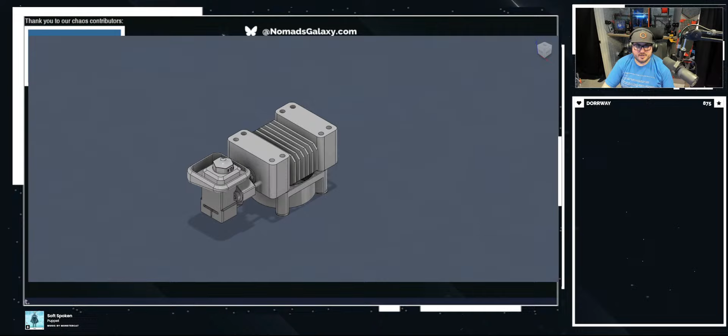Okay, there we go. So how do you do that really cool effect that we do for the t-shirts? It's actually kind of easy. We go into animation, and what we're going to do is literally break apart the CAD. There is an option to just straight up explode the CAD, but I don't like that too much, so we're just going to manually take this apart.

And we're going to do it from this perspective. Is it being weird? There we go. From this perspective, that goes the furthest most out. And that.

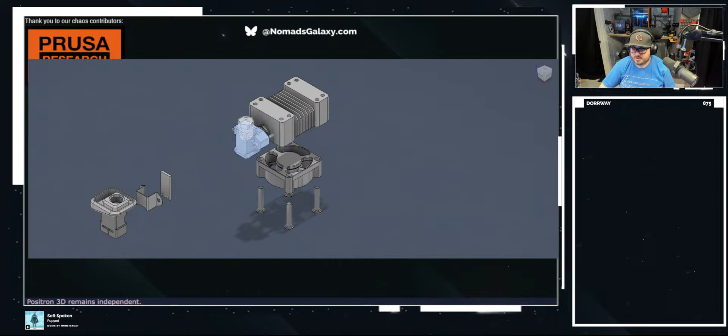I'm gonna grab both of these and move it over. And then we bring that up.

Drag these out. Let's see, who else is here? Who else is in stream? I'm seeing Mad Owl, Cody, a robot overlord, LTX - hell yeah, only the coolest of people. Clown Hammer. Who else?

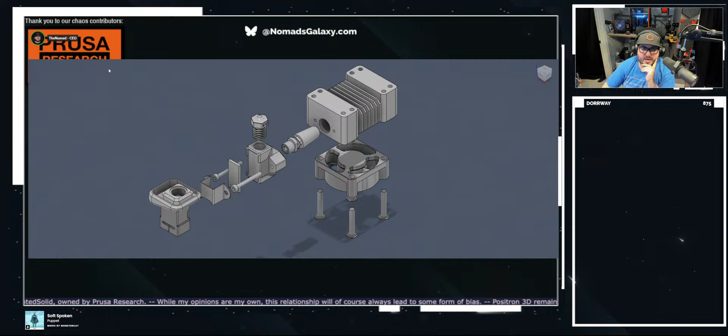Okay, so now we've exploded the CAD. What we can do is, I'm trying to remember where it is, but there's a way to essentially take this and export it.

I'm just trying to remember. I think it is... export. No. Okay, new drawing from animation. Yep, storyboard 1.

Yeah, we had to reboot to fix everything. Okay, now we go in here, and what we're gonna do is thread edges, interface edges, and let's see.

It's not doing anything. Why is it not changing? Oh, there we go. Okay, so let's do visible hidden edge. Ooh, nope, we're sticking with that.

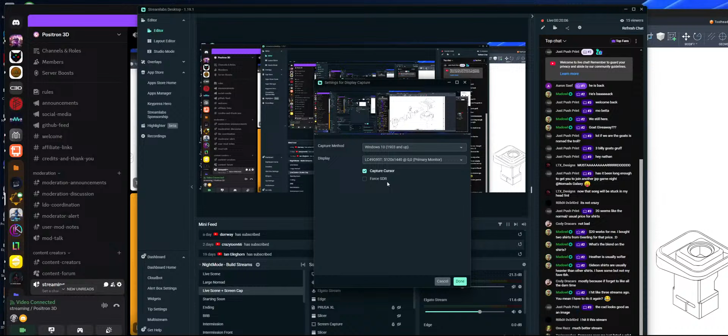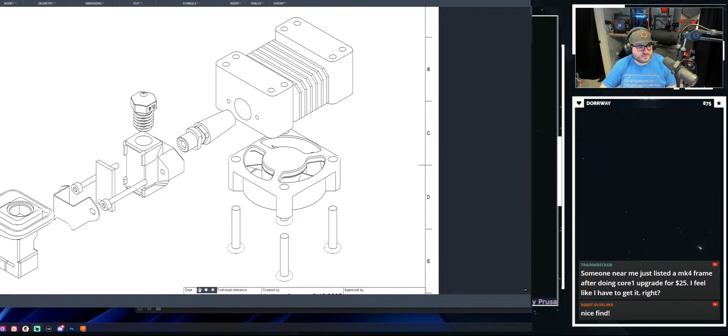And we're literally just going to trim this down. There we go. Now you can actually see what we're doing here. Sorry, I didn't realize you guys couldn't see that. Fusion is really stupid when it comes to streaming, it's a whole spiel. Okay. So anyway, now we have the exploded CAD as it should be.

So what we can do now is I can actually export this as a PDF. And then I'm just going to export this as exploded hot end. Now we're going to take it up into Adobe Illustrator.

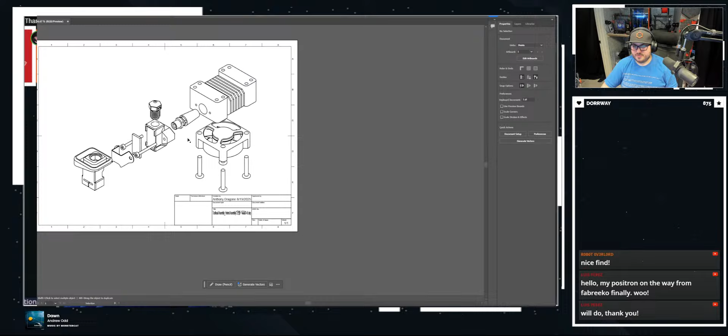Okay, so now that we have this as a PDF, the great thing about PDF is that this is all vectors, so this is infinite resolution. So we don't have to worry about anything.

What I will do is just delete my personal information here. Oh, okay, so that's the way this is layered, weird. Okay, delete and delete. There we go.

All right, and there we go. Centered. Okay, so now what I can do real quick if I want to make this look a little bit more... oh, the strokes are different. Damn, okay, we're going to leave it as is because I think that's pretty good. You can very clearly see what's going on here.

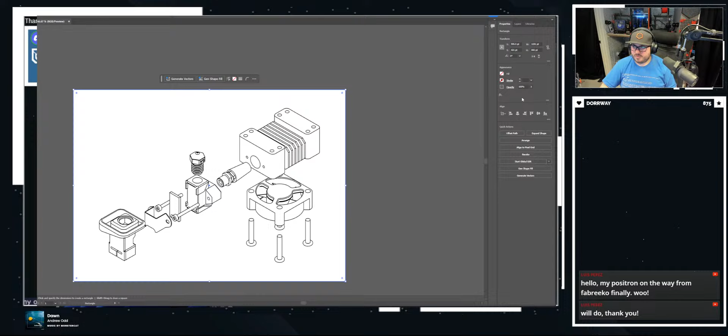What we're going to do... Nomad, do you want those screws, the mounting screws, do you want them moved? No. The ones in the front? Yeah. Are they not a different position? One second, maybe that's me being OCD. No, these are in the right position. The whole idea is that if you were to sandwich it together, it would be technically correct.

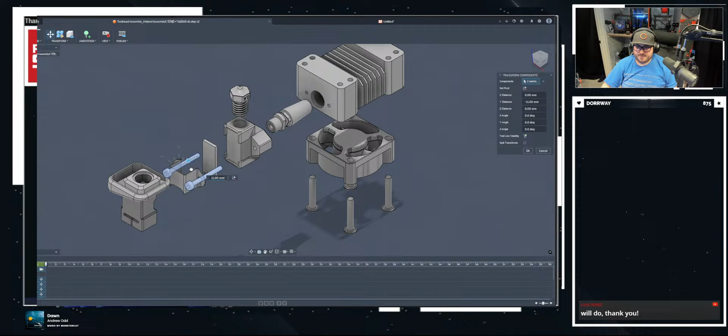The ones that fasten the heat break on, not... yeah, technically it is in the wrong spot because it's technically ahead. So if I go back in here real quick... actually, that's a good idea, just keep it like that so it'll trigger people. Right, now I can swap these around, but you can kind of see how that disrupts it a bit. Yeah, you need to push everything. With this, it's a little bit more visually distinct.

Yeah, chat, what do you think? Should we swap the position? Should I move this closer? Ooh, because I can do this. Chat, do you think we should do that, or should we keep the screws attached to the heat block? What do you guys think about this?

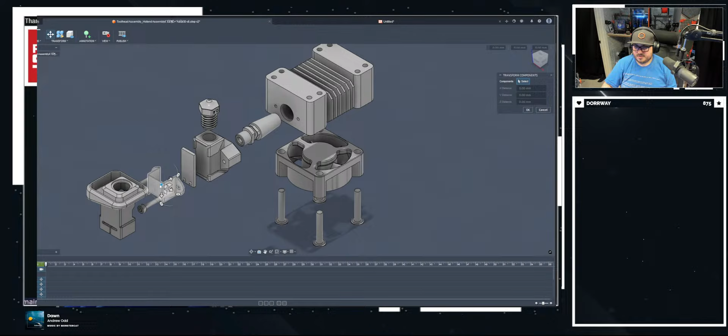No, no, furthest out? Move the heater. Where? I want to see the full geometry of the heat block.

This? Yeah, the front, move those a little bit. The heat block or the sock? Why do you need socks? People don't need socks. Anyway.

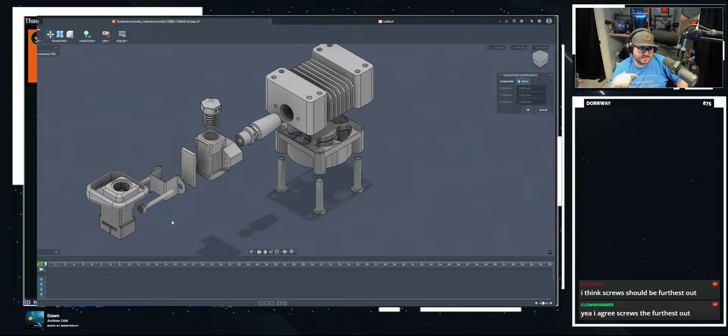Let's pull this up a bit. There we go, it's a little bit more condensed. Okay, so that is now appropriate, because the sock, the heat sock, the silicone sock, that's actually going to be last because that kind of goes around everything. All right, that works, cool.

So we're going to go ahead and do new drawing from animation. I'm going to hit OK. It's going to hop back in here. We're going to set the scale to 2.5. We're going to go in here, set that to visible edges only. Interference edges. Okay, and there we go.

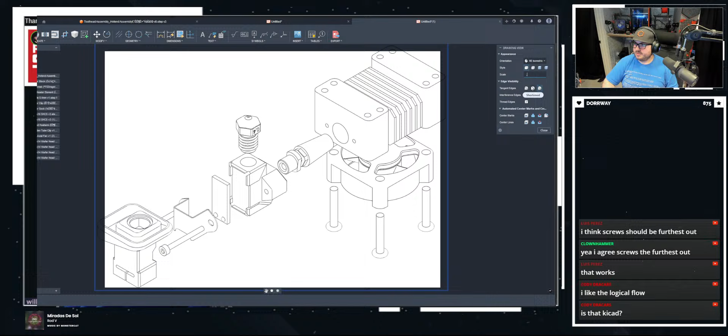Actually, let's bring this up to 3 now that we have more space to work with. No, this is Fusion, this is all in Fusion. While I'm in here I'll just go ahead and delete these assets because we don't need them. Let's scale this to, oh no, let's do 3.5. There we go, perfect, okay.

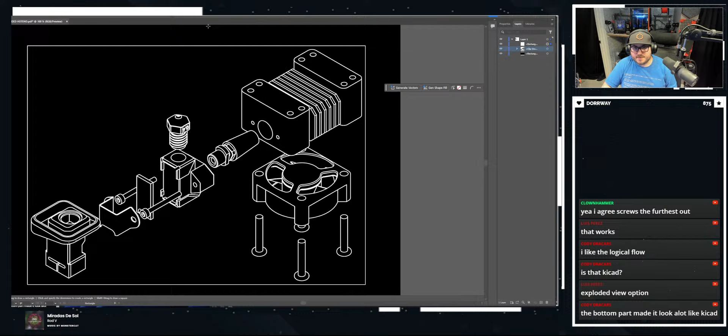This has been... I'll move this over. There we go, and shrink this down. Right there. Okay, that's fixed. Okay, so now what we're going to do, we're actually going to just delete this.

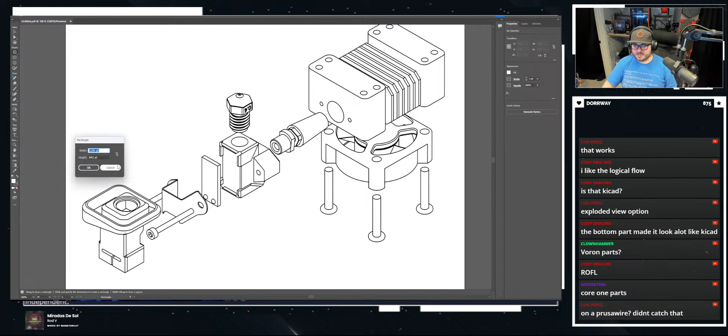Okay, now what we're going to do here. So technically, no background should exist. Technically. So we're going to select everything, select stroke, set to white. And now what we're going to do is put a black square behind everything. This just helps us confirm that everything is indeed the right way around.

Okay, so as you can see there is this path on the outside we want to get rid of. So we'll delete. Oh, God.

Cody, I like what you're thinking. I have a Mark II. Another Prusawire, friend. Okay, there we go.

Now we delete that. I mean, it doesn't matter, we're gonna go ahead and keep it 12 volt. Should I do a Mark II export? And then this is going to be exploded hot end SVG.

Now we open up our... now we open up Photoshop. Just gotta make sure it's... there we go, this is a jank stream, guys. Open. Exploded hot end SVG, okay.

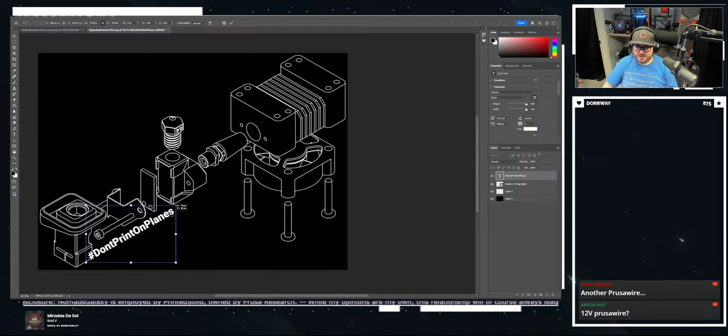That doesn't feel like it is. Oh, actually, maybe it is. All right, we're going to just nestle that right here. That feels appropriate. And I'm going to take the positron logo.

Oh, that's why. Where do I have automatically? Yeah, auto select, turn that off. I don't want that. Okay, there we go.

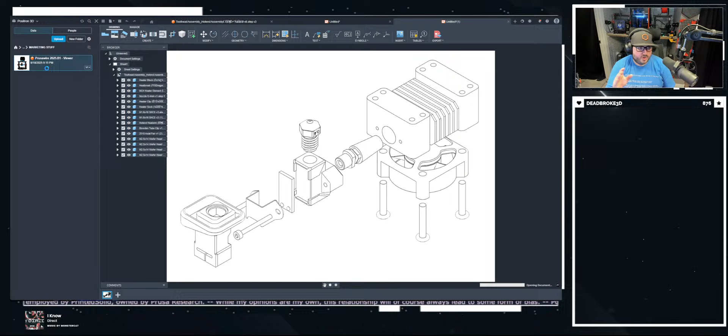So what we're doing here, any of you can do. If you want to make an exploded CAD t-shirt, this is how you do it. It is really not that difficult, it is just time consuming. So let me go ahead and get rid of these since we don't need them anymore.

Okay, so we're literally going to animation. Okay, now I'm going to actually change the visual style environment to gray room just so I can see a little bit better. I don't need to save it locally, I already moved it to something else entirely.

Okay, so what we're going to do, we're going to hide stuff that's not critical. Yeah, this is in a marketing folder, so everything I do will not affect anything of what's actually going on here. Okay, pulley alignment, heat set insert, okay, hide all of those. Now we're also going to hide the spools because we don't need those.

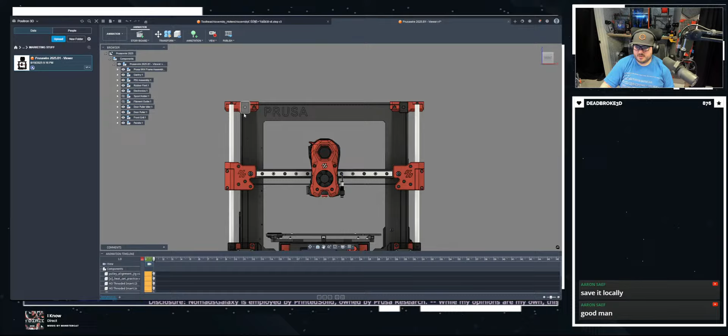So now it's time for the fun part, where we literally just start ripping things apart. So this is how I do it. So we're going to go in here.

Alright, just push print. You have a good one, man.

This is why this process takes forever, because you really have to think as though you're assembling the printer, which is difficult because I haven't done that yet. And we're just unsandwiching the printer.

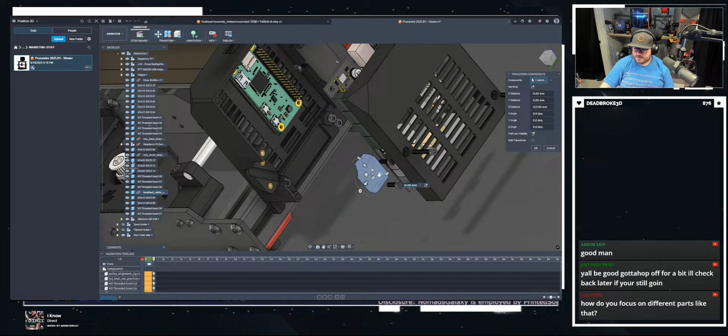Oh, how I'm doing this is with a space mouse, I have this little guy here. It's expensive, but it's worth it if you do a lot of CAD. If you don't do a lot of CAD, don't bother.

Why is the Pico in here? That doesn't fit. I'm going to hide that.

Yeah, once you put the time into learning how to use a space mouse, it's great. Alright, do I leave anything behind when I do this? Yes I do, of course I do. Because why would it be that easy?

Alright, we're gonna undo everything we just did because I want to try a cheap way of doing this. So there is a really cheap way to do this, and if you go in, where is it? Auto explode all levels. Go up here, select everything, this should calculate how to automatically explode the whole thing.

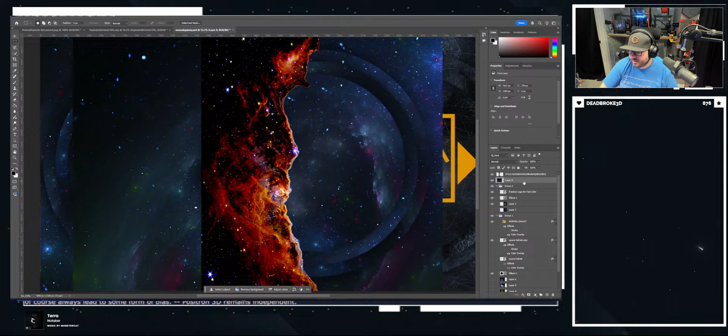So what I'm going to do here is take this layer, or group 1, and put this above. Now we're going to play around with this. Nope, wrong one. Sorry, this layer, and it's blurring.

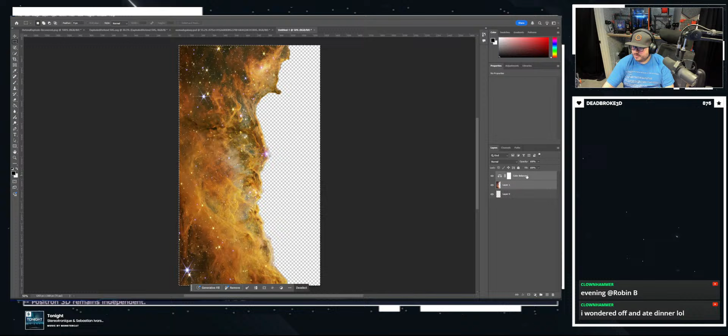So we drag this right here. Okay, now what I'm going to do... this probably won't be subtle, but it should look pretty good. If I could do this right.

There we go. Smudge. All right, there we go. Now,

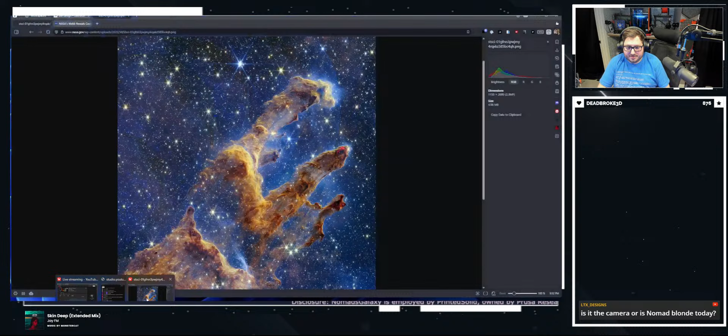All right, back to what we were originally doing. Site design. Edit image banner. Delete that. Downloads.

It's larger than 4 megabytes. Come on! Really? Seriously, we just made this.

Okay, image resizer. Yeah, resize it to 1080p. That's 2.5. Let's see if we can get it down to something a little bit less than that. No. Let's try it.

That looks really good, actually. That looks good. That looks good.

We don't need heading text. We don't even need a button, actually.

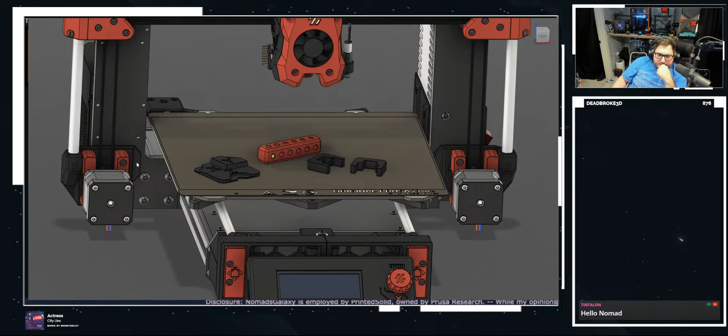I don't think it quite appreciated what I was doing earlier.

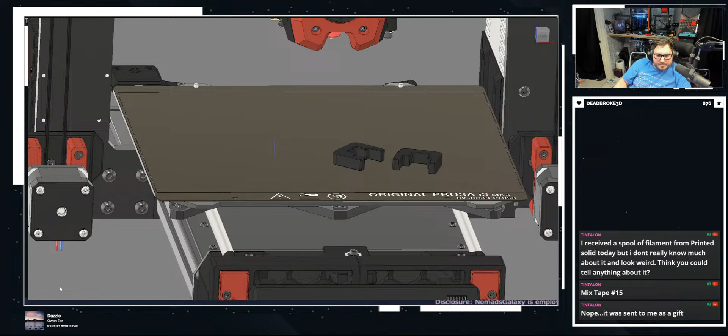Mixtape number 15. Yeah, are you part of the subscription box? We send out mixtapes when you're part of the subscription box. It was sent to you as a gift. Oh okay, so a friend sent you the subscription box as a gift. So mixtape filaments - mixtape is a custom filament that we make for our subscription box subscribers. It is custom, you'll never see the color ever again. It is entirely unique, and it can even be unique to every single spool.

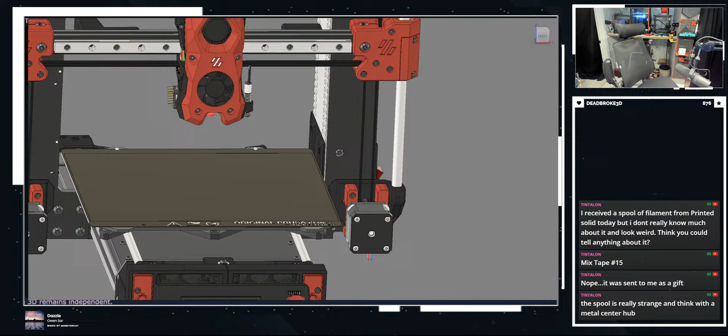Spool's really strange - think, oh, that's an old mixtape then. Let's see what one of them are. For example, this is mixtape number 39, so that's an old mixtape. Yeah, that's... have a good night, safe. That's an old spool, not saying that it's bad or anything.

Someone made a rotary cell phone. That's pretty cool.

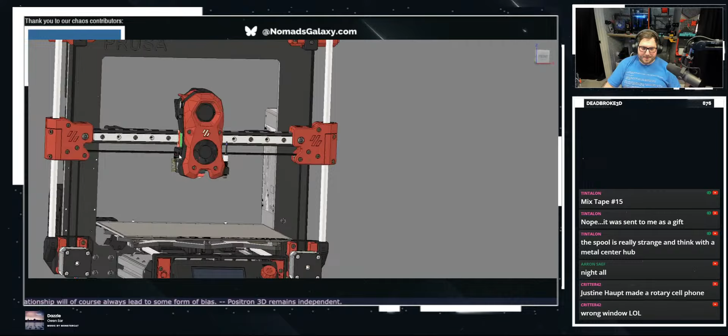Okay, so there's no way in hell we're going to be able to automatically explode this out, so we have to do this by hand. So ladies and gentlemen, we're in this together. This is going to be painful, but yeah, we're in this together. So... oh boy.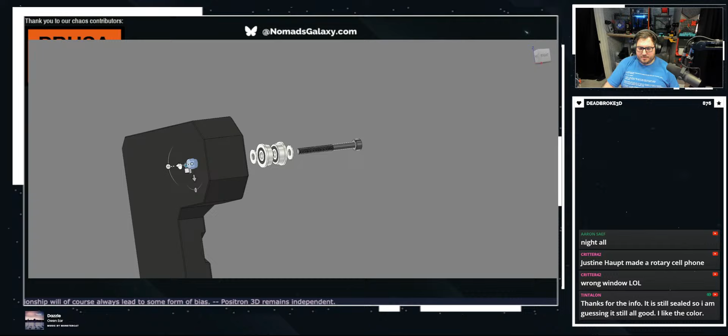All right, so if I look at this way, I think - okay, we're gonna drag that out a bit more.

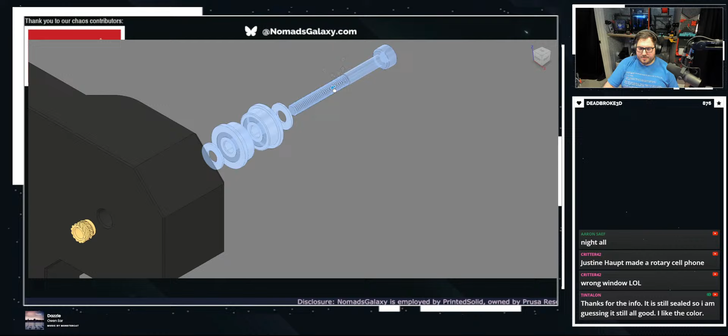What the hell are you? Ah, TDK, okay, get rid of that.

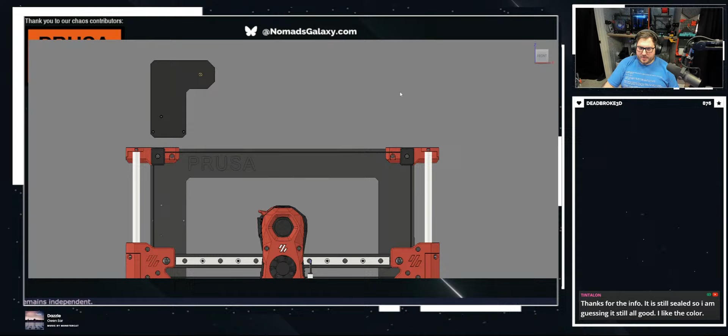Yeah, this is hard. I don't know exactly how I want to do this. You know what? I'm going to do things a little differently. I'm going to be a little weird with this.

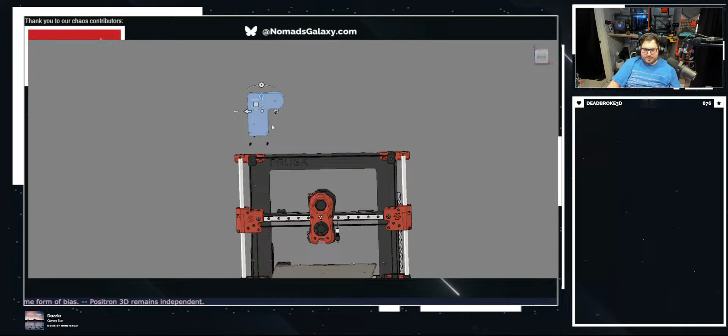Let's play with perspectives a bit. Ooh, okay, I just figured it out. I figured out how I'm doing this. We're locking in, chat. Since we're using orthographic, we don't have to worry too much about perspective.

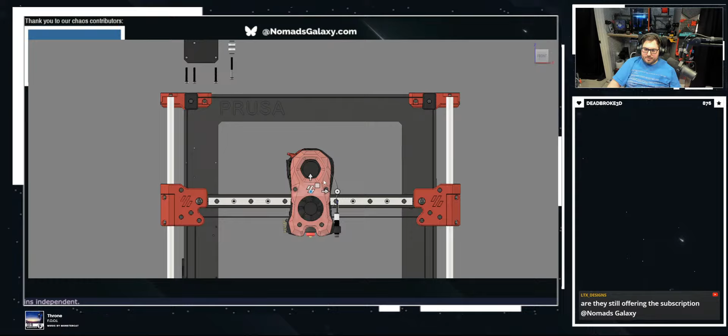Drag this up here. Okay, and then we want to do that to the same. Hold on. Move these both back down. Grab those, move them up, so they're in the same plane.

Oh, this is going to look so cool if I can do it right. I just have to execute this appropriately. If I can execute this...

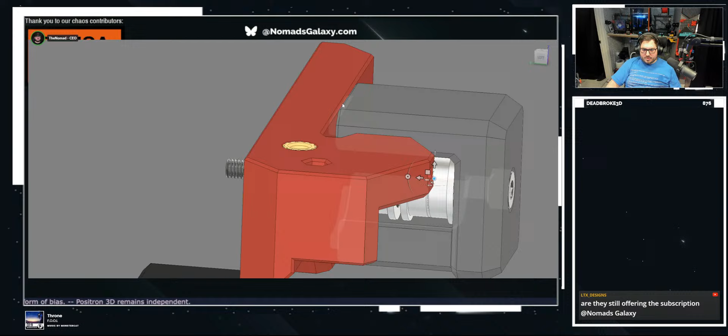What's going on with my mice? What the hell? What's going on? Is my mouse dying again? Oh, no, that's weird. Just having interference. Okay, anyway, back to what I was doing.

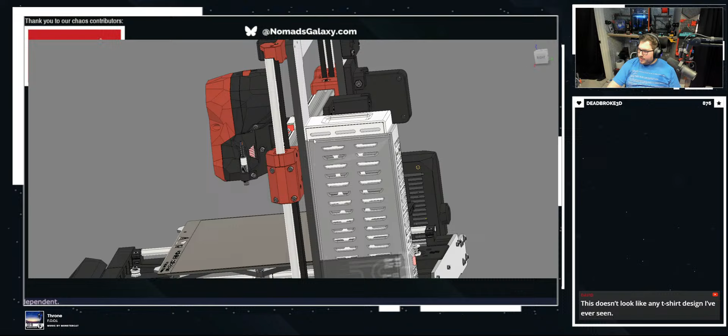No. Ah. Oh, there we go. Okay. Nope. Oh, we're getting there. No, did it? Oh, it just undid everything that I did. No. Oh. Okay.

No, so David, I'm actually showing off how you can make a CAD, so we're showing off how to make CAD into the exploded CAD t-shirts that we do.

And it's a process. Yeah, I broke it, I have to start over, because I forgot how weirdly finicky the move tool is. It is weirdly finicky. And now that I remember how finicky it is, I'm going to be very mindful of it, and I'm going to hit OK very often.

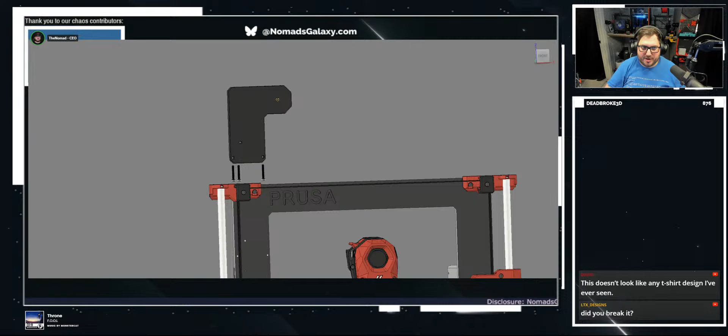So if you use the animation window in Fusion, you can position all the items in a very interesting way. If you go back to design, for example, everything's back to where it was. It obviously did not keep where things were.

But now if we go back to animation, all those positions are kept. Very mindful, very demure. No. But what we can do with this is we can actually export animations as drawings. By doing that, we can have a wireframe of essentially the whole thing.

So I need the bearing stack and the screw here. And then I also need the threaded insert. Nope. There we go.

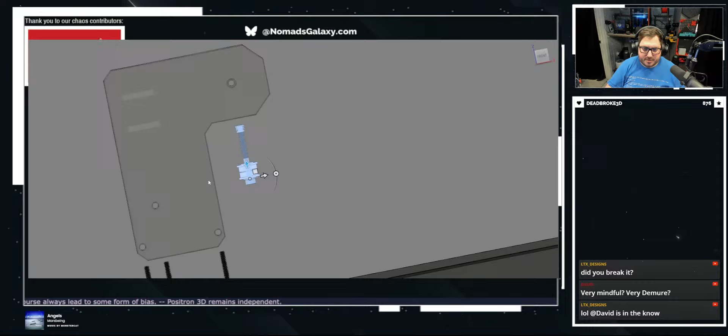This is a trick I learned a while ago. So now we drop this down. We're going to hit OK. The more you hit OK, the better.

Drop this screw down with the rest. Let's try and get that lined up. Yeah, right there. Okay, drop that. Drop that, drop that. Drop that. And drop that. Okay.

So essentially what this all will do is it's going to look like this on a t-shirt once we're done. But we're going to be exploding the entire CAD to be able to get that. Oh, sorry, it's going to look like this. Similar to how they used to do Voron guides.

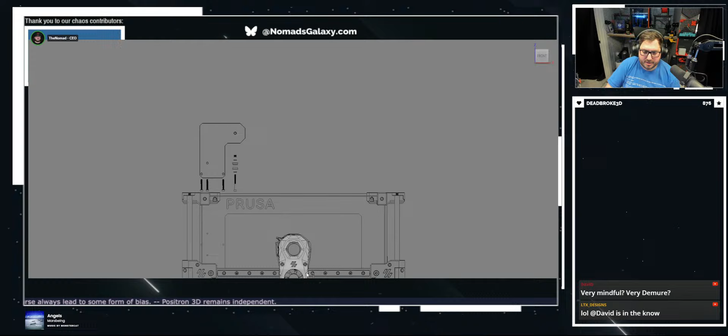Okay, so now we go with X-Y axis. Outer block left, outer block right. I'm going to take these, move them up. Okay.

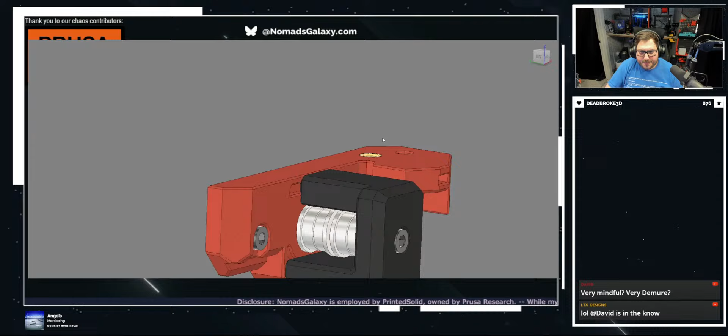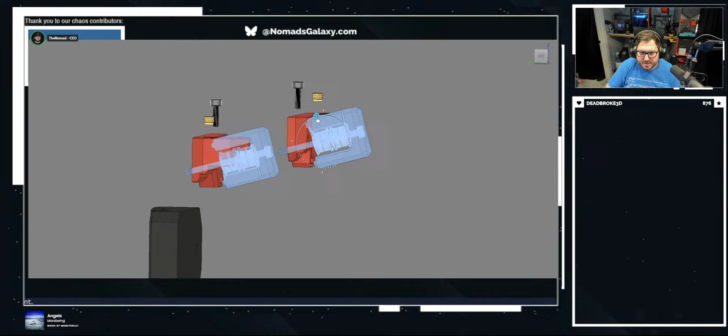Move tool. Okay, now grab the same thing here. So outer block, bearing stack, and 3x40. Okay, now we're back to where we were. So now we're just going to take this, rotate these 90 degrees. Oh, it just unselected everything. Select, outer block, select. Nope, wrong one. Outer block, there we go.

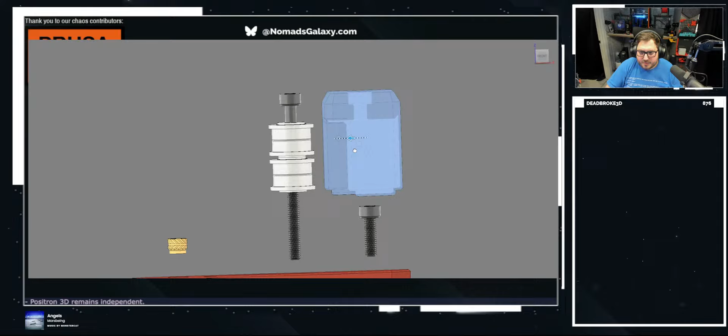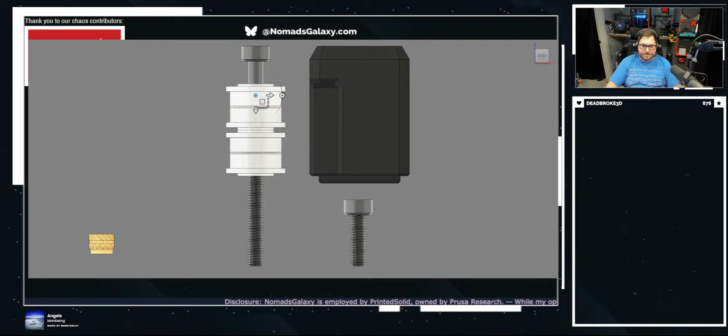Oh god. Move that over and 20, do it again. Okay, move that over 15. Trying to keep these as symmetrical as possible. Okay, go. Oh.

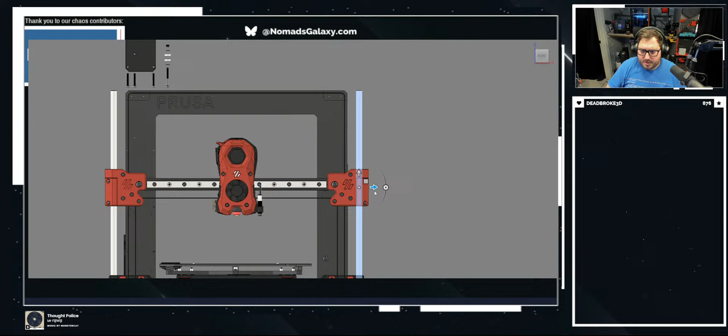This is gonna be simple. We just drag those out by 30 mil. Yep, okay. Now up here is gonna be where the tool head's gonna go. Where is the tool head?

Gantry, XX assembly. Carriage? Nope. Yeah, carriage, okay. So we're gonna drag this up here.

All right, this is where things are gonna get complicated very quick, considering this is a Stealthburner. So we're just going to shift this over right to there.

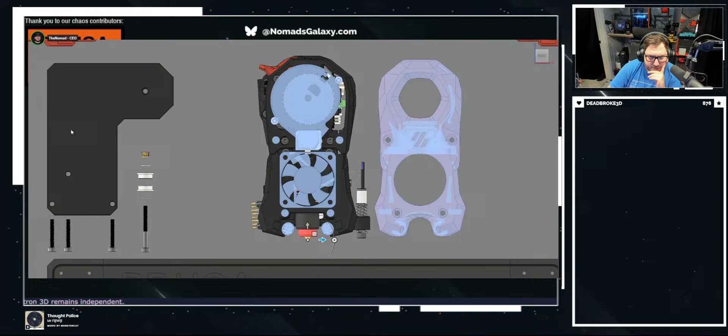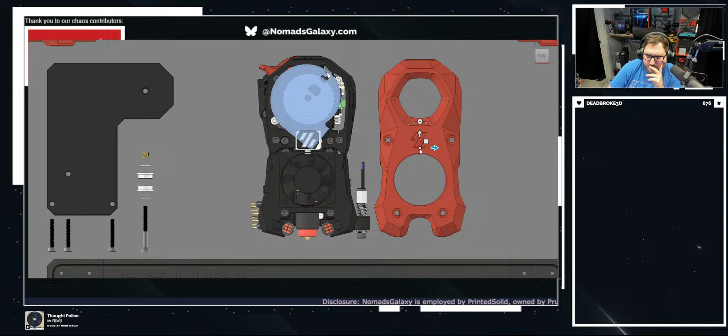Just want the fan. Set pivot. Set a reference point on another model. Okay.

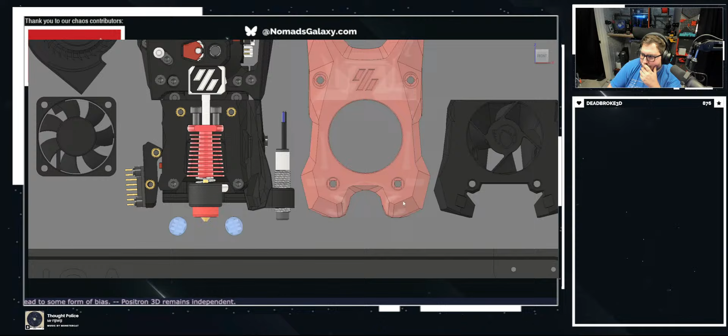And yeah, this really is, we're just picking it apart as far as we can. That's all one model, so we can't pick that apart any further.

Thankfully, we don't need to necessarily care where they are, because this is just kind of a visual representation of everything that's used in the build. Or, you know, as the fancy people say, an artistic representation.

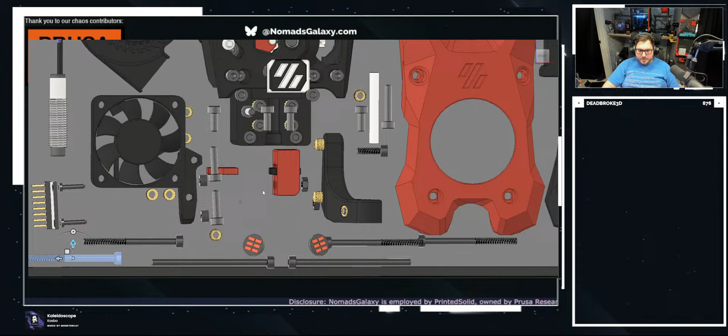What happens? Oh, it's all the way down there now.

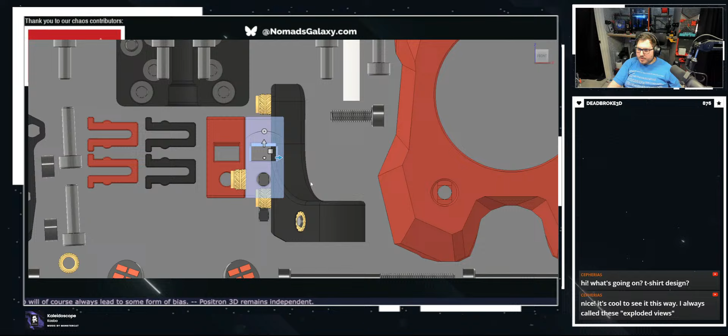Yeah, this is an exploded view. It's gonna look so cool once I'm done.

It's just like you're playing Tetris, trying to find a spot for every part that you see.

And I'm doing something a little bit different. You can see that this piece is slightly rotated. Normally you'd want to orient the pieces so they're appropriately sized, but I'm actually rolling with this. This looks cool because it kind of helps encourage the fact that, yeah, it goes with this.

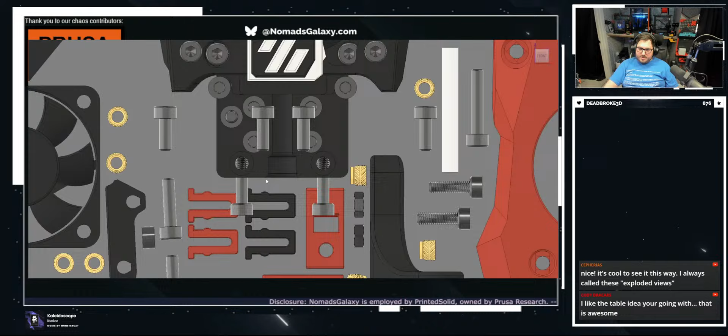Oh god, there's so many screws in this one. Yeah, for these, this is where I will rotate the screws, and then I just gotta find a spot for them somewhere.

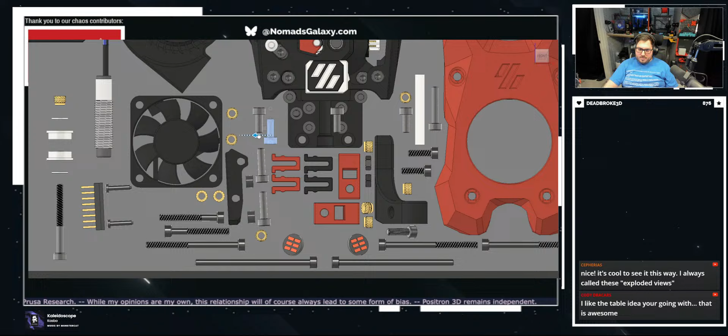Yeah, I had to do this for the Positron CAD to get it to look like it does on the shirt right now. It's an interesting but difficult process. Some of these details you're not even going to see on the shirts, but because there's a chance you might, it's best to just go in and do this.

We're just going to drop this screw up here. Someone will notice it - someone probably will.

We could technically make a desk pad from it if we really wanted to, and I just might. But I'm just going to make a t-shirt from it.

And I think this is going to be... actually, I'm realizing something important right now. I gotta take out the Stealthburner. Sadly, I have to take out the Stealthburner, and the reason is because the Stealthburner is not our design.

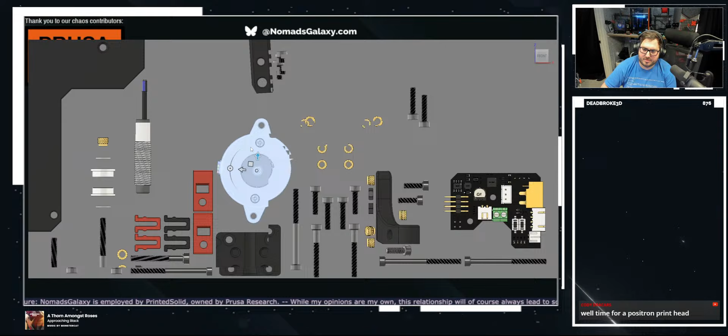Honestly, I'm liking this as it is. Removing the Stealthburner actually decluttered this a ton in a helpful way. I can actually now bring more of the Prusa Core parts down into the mix here, kind of bringing the focus back on the Prusa Core.

I'm going to leave... yeah, I'm going to leave those where they are, because what I will now do is grab these. Yep, right there, and then...

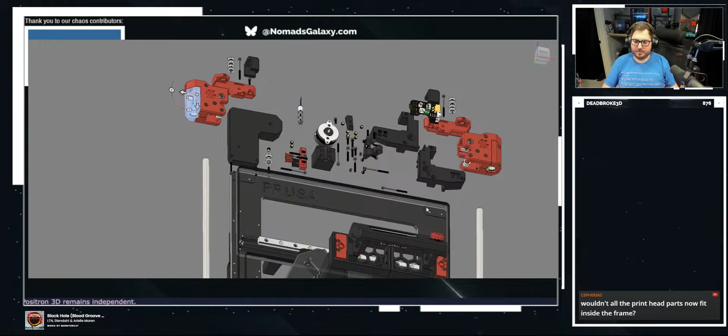Okay, so essentially I have to keep in mind exactly how I'm doing this. Rotate 90, rotate 90, okay, grab both parts, move them down, okay. Go, grab the bearings, drop them - right there is perfectly fine. Okay, grab the screws, pull them out, right there, then grab the other screws. So the first one was 35, second one is 20, okay.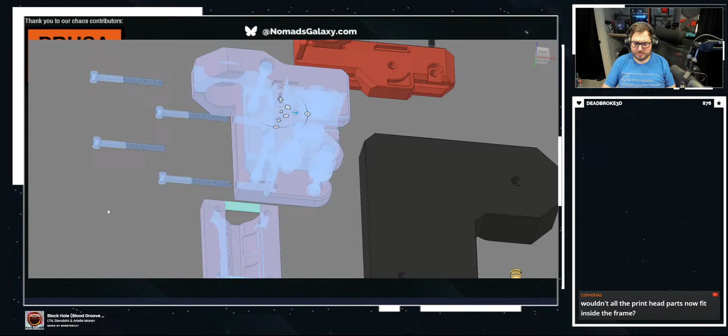So first set of screws, pull them out, 35, and then 20. Okay.

Am I not able to pull? No, it can't - okay, so that can't be pulled apart because of the way it's integrated. It's fine, let's grab these pieces, rotate them, drop. Same thing here, rotate, drop.

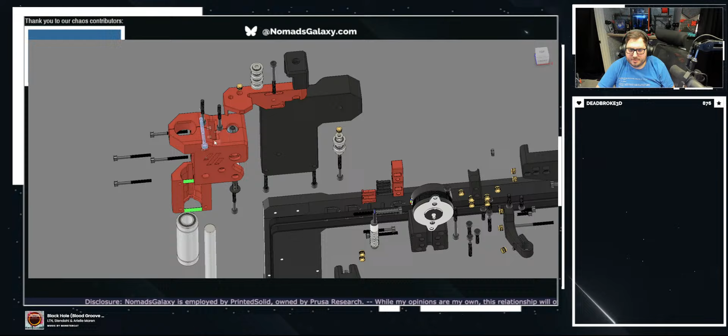Rotate - do we want to lift? Yeah, lift. Okay, actually for this, okay, rotate 90. Rotate 90. Okay.

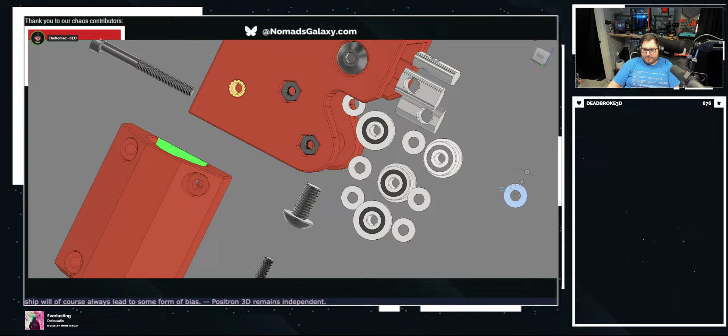Yeah, sorry for going quiet. When I start to focus, my brain just locks in. This is just one of those things where it's busy work, busy work, busy work. Ah, my wrist. This is likely going to take us a few streams to do. This is a lot of work to try and get done in just a day. Come on.

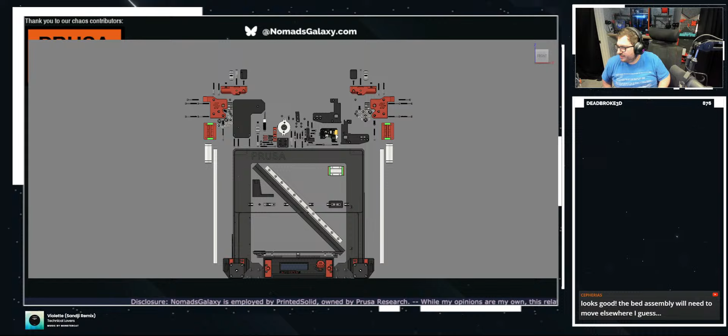Yeah, I'm gonna experiment with it a bit more. Oh yeah, my wrist is killing me right now.

Okay, I'm going to save all this work. Let's go ahead and pull up Edge real quick.